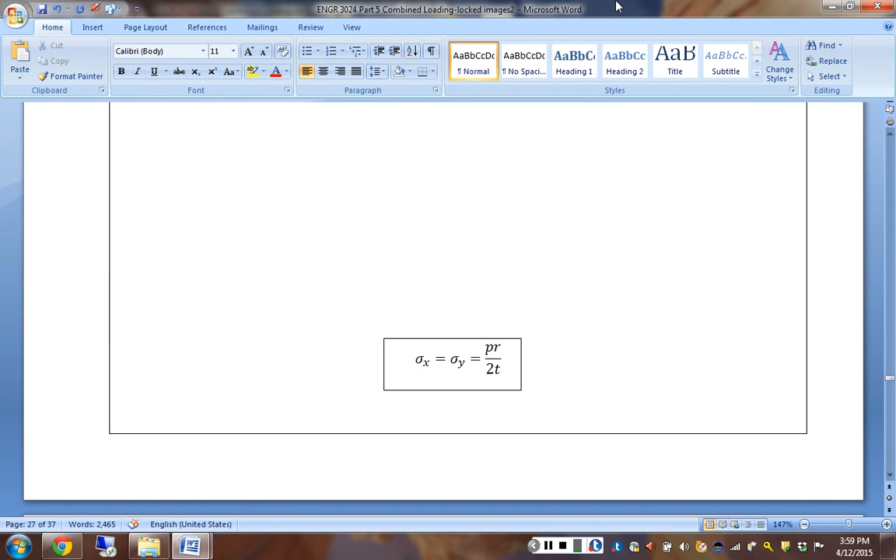Alright, so these first couple of pages have established that for a cylindrical pressure vessel, you have hoop and axial stresses that are not equal, and it is twice as big in the hoop direction.

And if we take this case for a spherical pressure vessel, because of the symmetry, we actually end up with stresses in any direction, regardless of the direction that we take the slice, the same as the axial direction for cylindrical. So it's stronger, it's a better case.

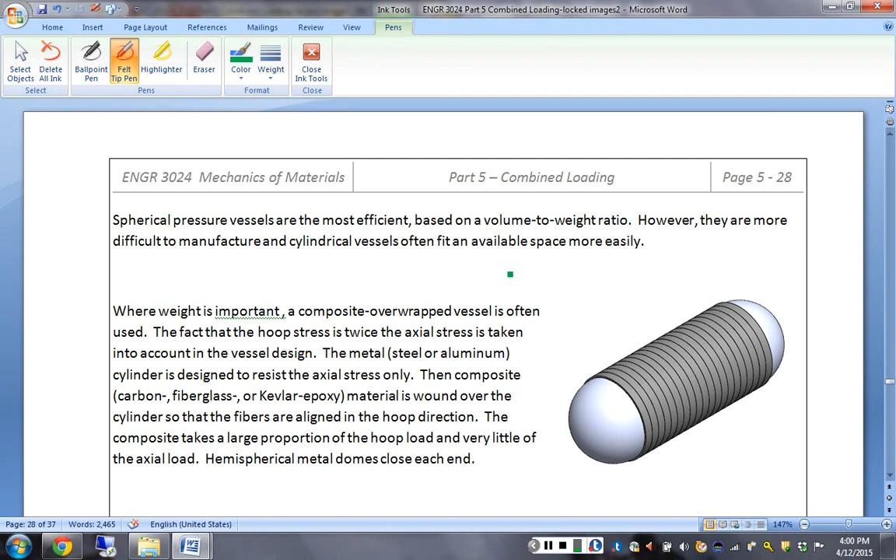One way that we can make a cylindrical pressure vessel, which are typically easier to manufacture and easier to deal with, is to take the hoop direction and support it and make it stronger than just the material is by its own accord. Doing that by wrapping with carbon fiber or any kind of composite to support that hoop direction and take that load.

So now moving into a little bit of material that's relevant to the pressure vessel lab that we'll be doing is thinking about these stress-strain relationships now that we have loading in two directions. This pressure gives us load and therefore stress in both the x and the y directions.

So far, when we've dealt with the relationship between stress and strain, we have had this case right here, a plain old Hooke's law. However, this Hooke's law is valid only when loading is in the axial direction.

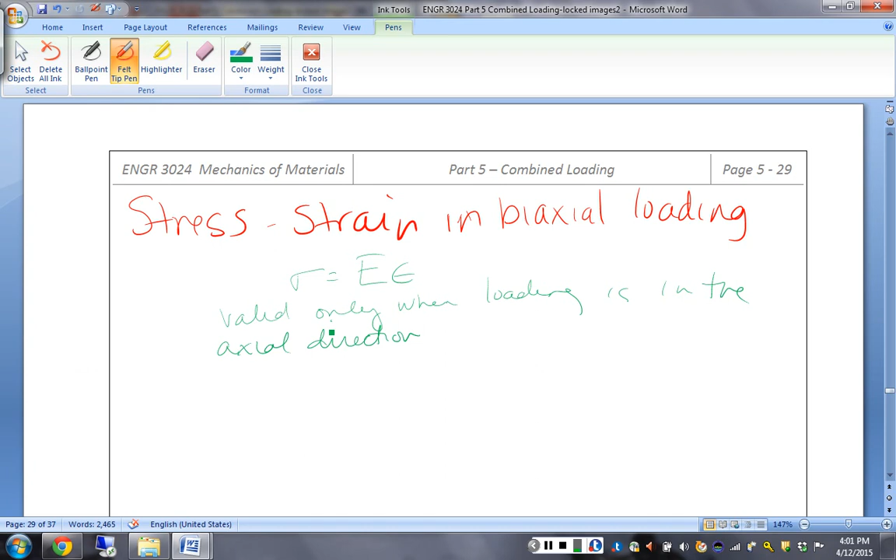We've got a little bit more going on now, and we need to think about what's happening in both directions. So if we have our section of material and we consider what's happening because of this applied stress in the x direction, we know that we expect it to get longer in the x direction and we expect it to contract in the y direction.

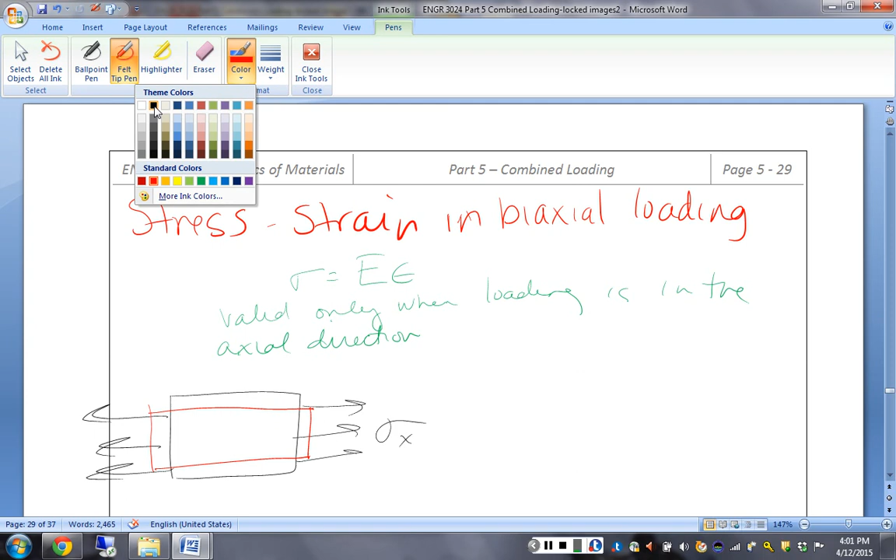We expect that the strain in the x direction is proportional to the stress in the x direction, but we know that Poisson's ratio enters the picture when we start talking about the strain in the y direction, and that is the negative Poisson's ratio times the strain in the x. That how much it shrinks in y is proportional to how much it grows in the x direction.

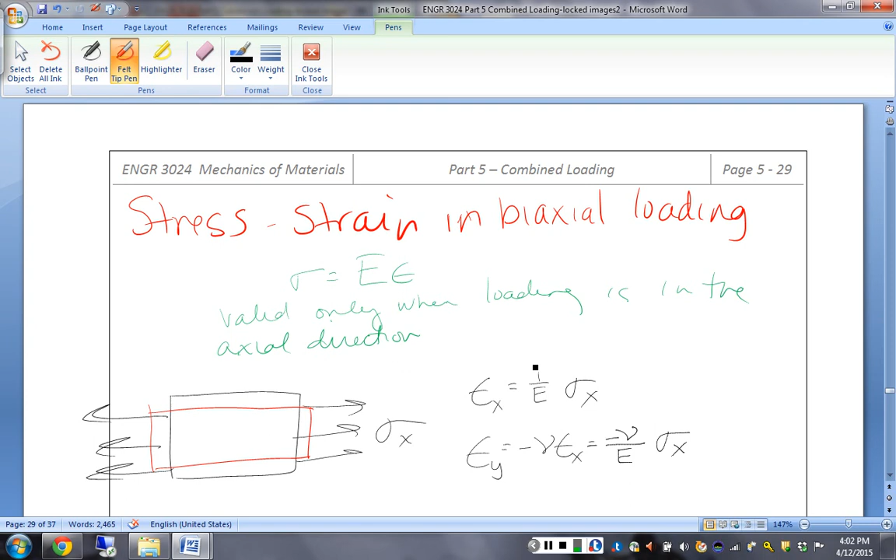But we can also say that it is related to the stress in the x direction as well. So we have strain in x is proportional by the modulus of elasticity, and the strain in y is proportional to both Poisson's ratio and the modulus of elasticity.

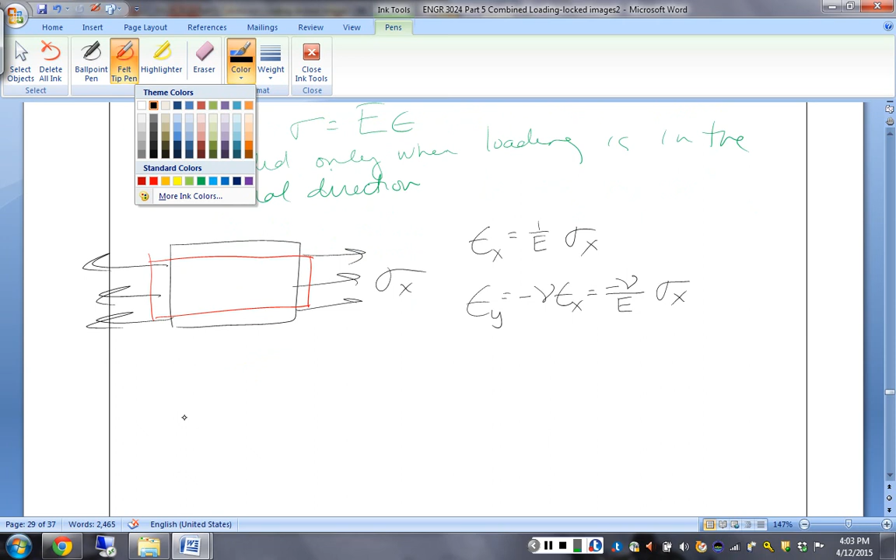Okay, if we now think about the contribution to the strain for our stress in the y direction, we know that our structure is expected to get longer in the y direction, shorter in the x direction, and we can write the same relationships.

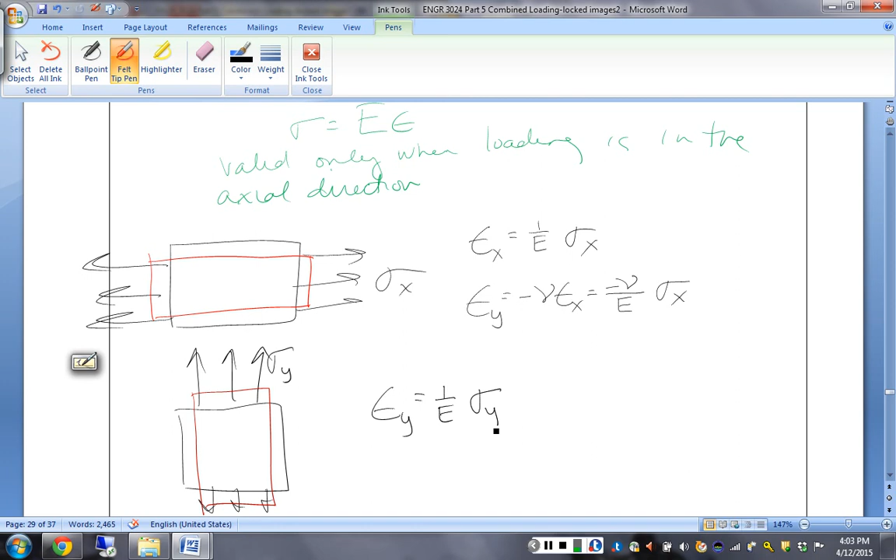That our y strain is expected to be related by the modulus to the stress in the y direction. The strain in x is the negative Poisson's ratio times the strain in y.

Or casting that in terms of the stress in the y direction, we again have this negative Poisson's ratio over the modulus times the stress in y.

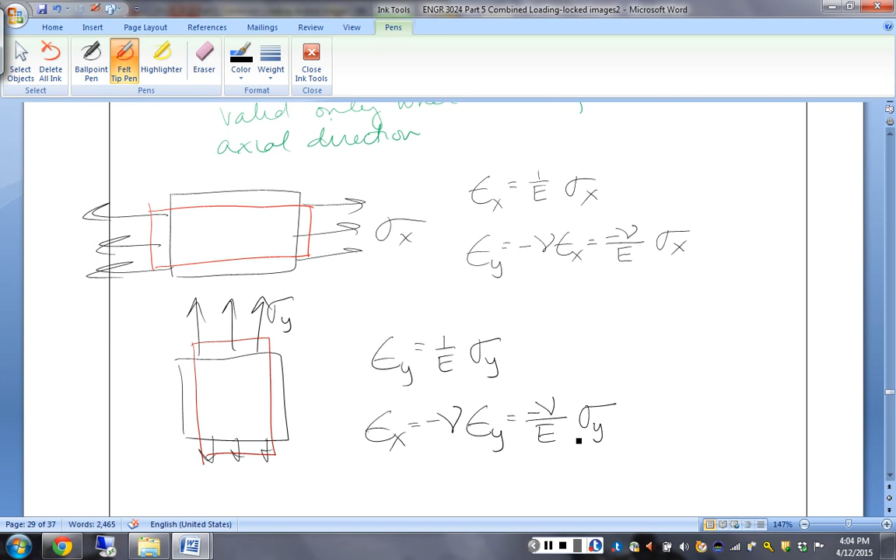The third thing that we haven't discussed in quite a while is what about the shear stress and the shear strain? That shear stress is equal to the shear modulus times the shear strain gamma, or if we're talking about these in terms of the shear strains, we can simply solve this as gamma is 1 over the shear modulus times the shear stress.

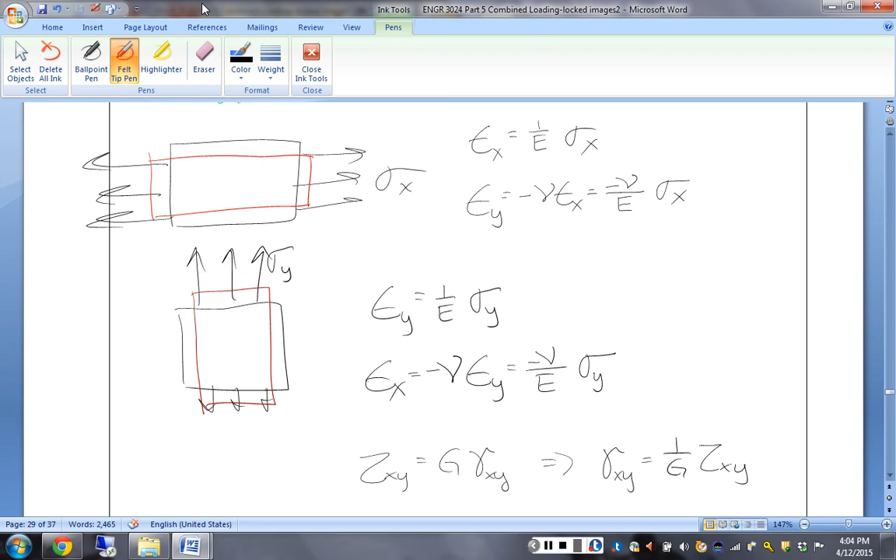So now we can take these expressions and end up putting them into a more compact matrix form.

So what we want to end up with is a matrix formulation that has our stress in the x direction, our stress in the y direction, our strain in the x direction, our strain in the y direction, and our shear strain in terms of the corresponding stress in the x, stress in the y, and shear stress.

So to simplify our life a little bit, we can think about the expressions. We have strain in the x direction, if we look at the first expression on the other page, is 1 over the modulus times the stress in the x direction plus nothing times the stress in the y direction plus nothing times the shear stress.

The second expression is the negative Poisson's ratio over the modulus times the stress in the x direction, nothing times the stress in the y direction, and nothing times the shear stress.

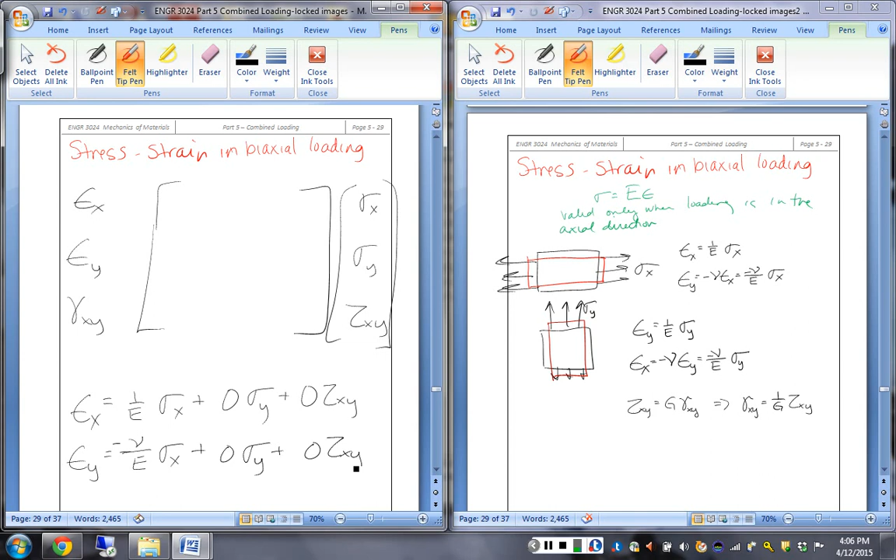Then we move to the strain in the y direction, which is equal to nothing times the stress in x plus 1 over the modulus times the stress in y, and nothing times the shear.

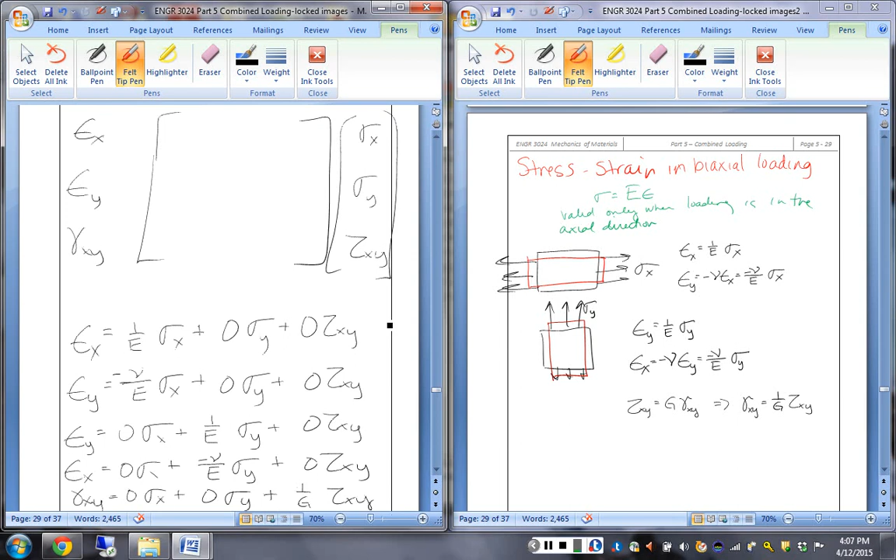We have another expression for the strain in x, which is nothing times the stress in x plus the negative Poisson's ratio over the modulus times the stress in y, and nothing for the shear. And our last one, gamma xy, is no x stress, no y stress, and 1 over G times the shear stress. So if we now put those into our appropriate locations in our matrix...

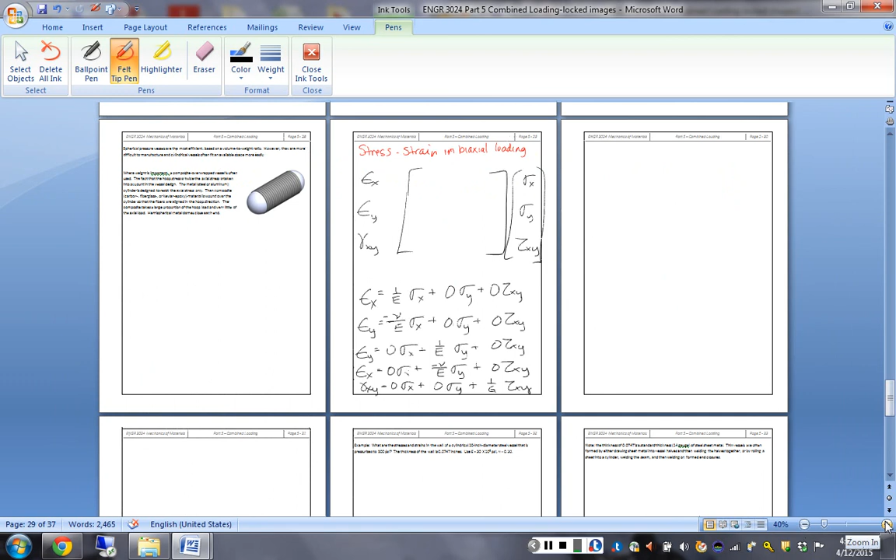We will see from the first equation we get a 1 over E. From this fourth equation we get a minus nu over E, and from none of the equations we get a 0. From the second and third equation we see we get a minus nu over E in the first position, 1 over E in the second, and zeros for the shear stress.

And for the gamma: nothing for normal stress in the x direction, nothing for normal stress in the y direction, and a 1 over G for the coefficient of the shear.

Now we have this matrix formulation for our stress-strain relationships. But what do our strain gauges measure? We measure our strains, not our stresses. We need to solve these so that we measure strains and we get stresses out.

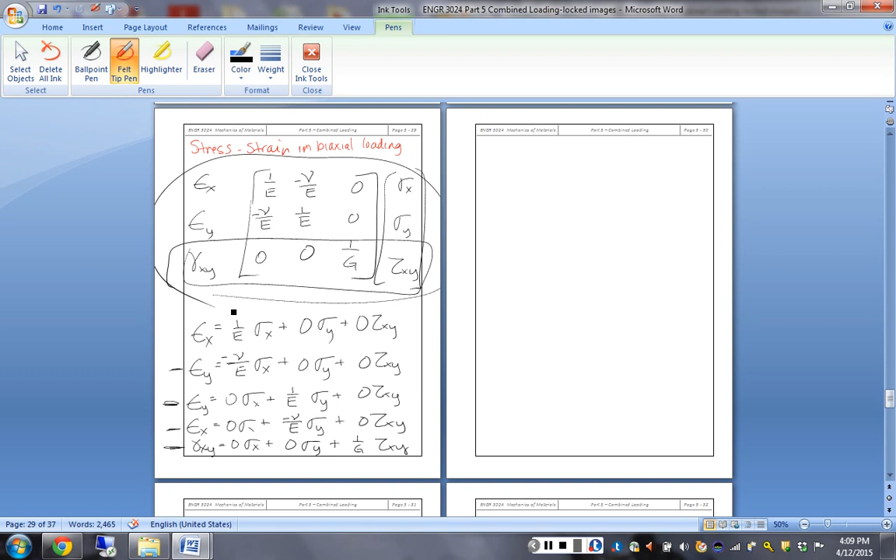And because these are coupled equations, we can solve these in closed form, and we end up with these two expressions which we can solve...

for stress in x, which is the modulus over 1 minus nu squared times this combination of the strains, and the y stress is equal to the same coefficient times a combination of the x and y strain, and again decoupled, the shear stress is equal to the shear modulus times the shear strain.

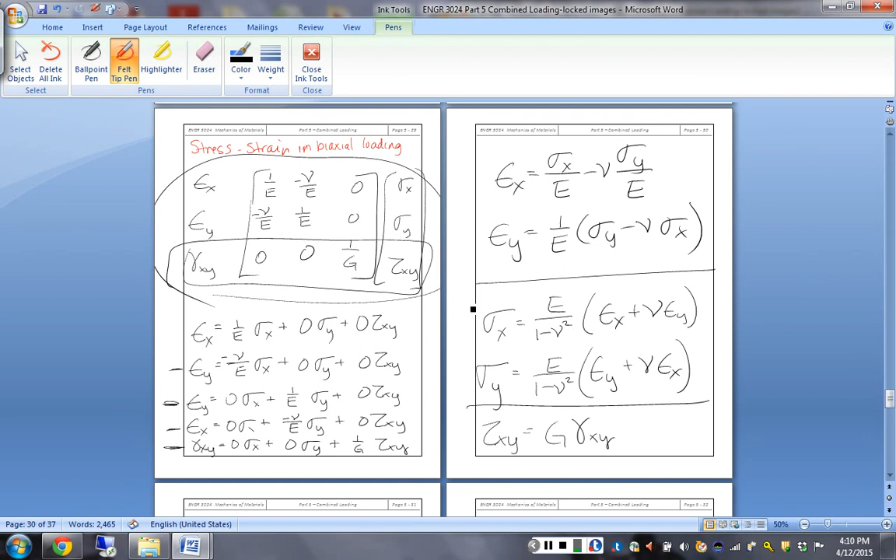With these equations, we can now move into an example problem. So coming back to: what are the stresses and strains in the wall of a cylindrical 10-inch diameter pressure vessel pressurized to 500 psi. We're going to say that this is steel with a modulus of 30 million, a Poisson's ratio of 0.3.

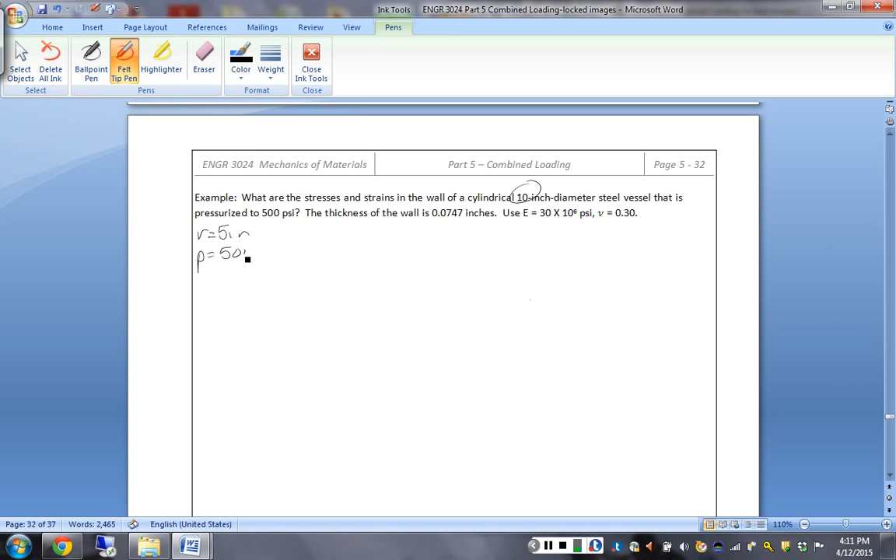A diameter of 10 inches ends up being a radius of 5 inches. We have a pressure of 500 psi, and we know that the wall thickness is 0.0747 inches. First thing, this is a cylindrical pressure vessel, so we can use our equations.

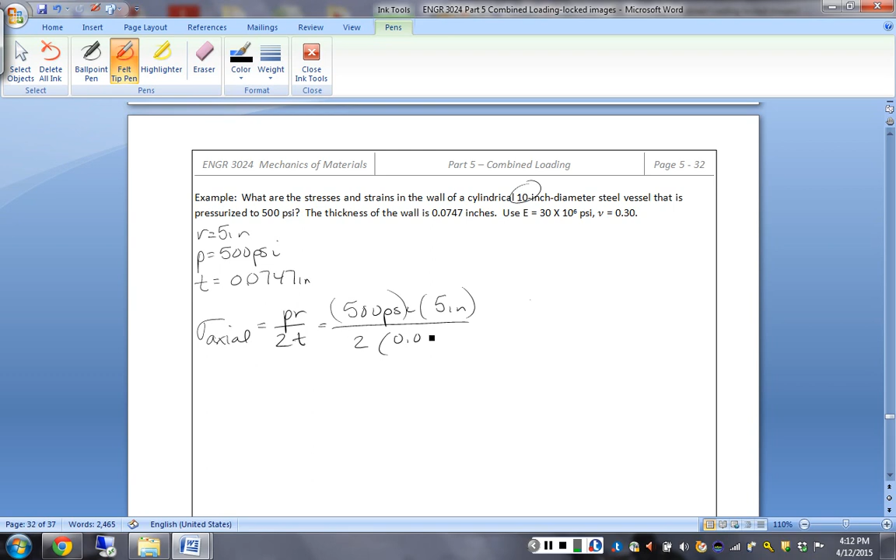The axial stress is PR over 2T: 500 psi times 5 inches over 2 times the thickness, 0.0747. So we have an axial stress of 16,733. We know that the hoop stress is 2 times the axial, so we have 33,467 psi.

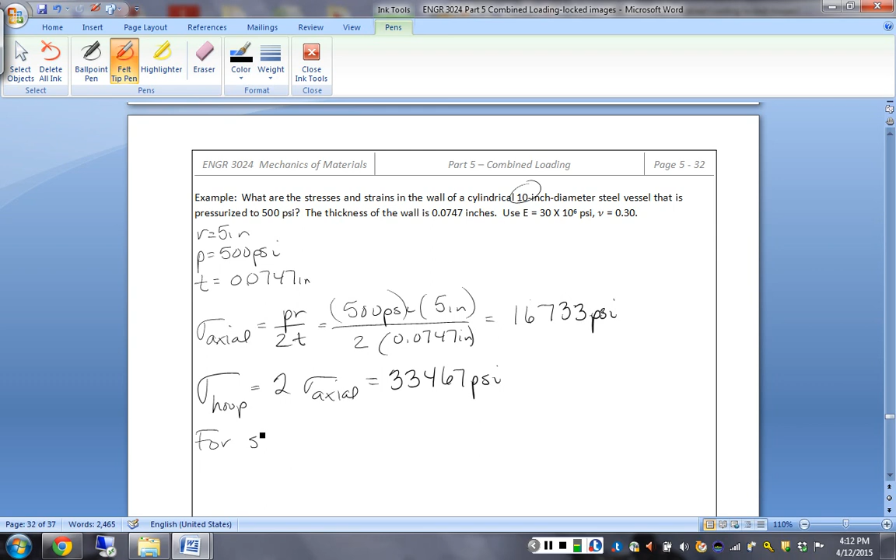Now, the expected strains in the forward direction, or strains as a function of stress, we have the x direction stress over the modulus minus Poisson's ratio times the y stress over the modulus, or pulling out this term...

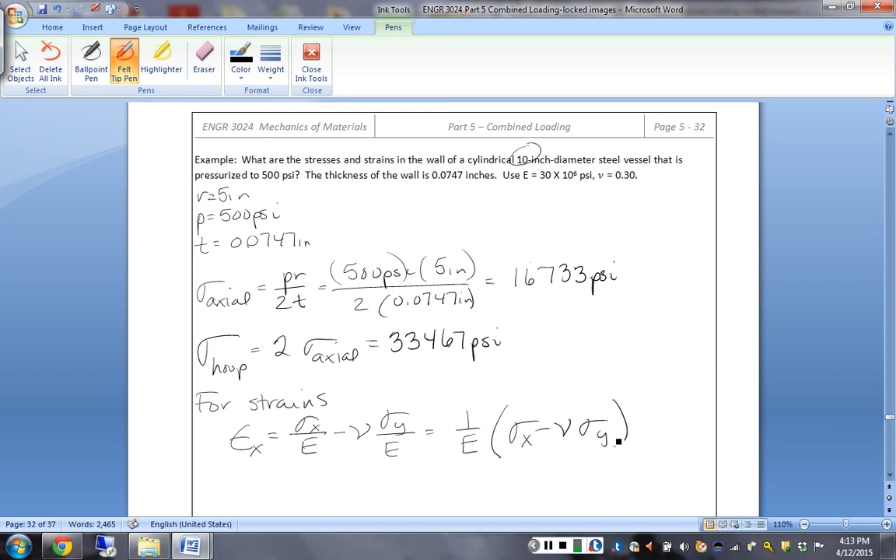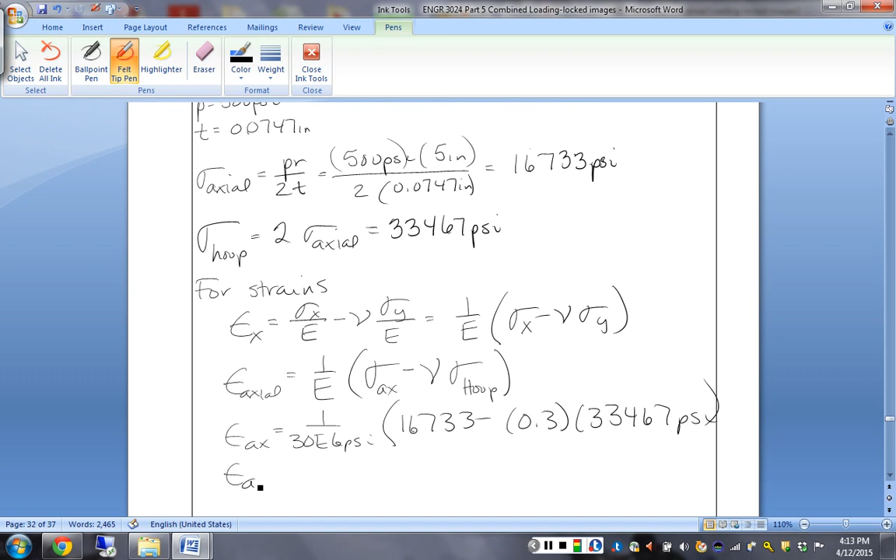If we consider our x direction, our axial direction, we can say that our axial strain is equal to 1 over our modulus times our axial stress minus Poisson's ratio times our hoop stress: 1 over 30 million times our 16,733, with a 0.3 Poisson's ratio, minus 33,467 psi. We expect an axial strain of 0.000223.

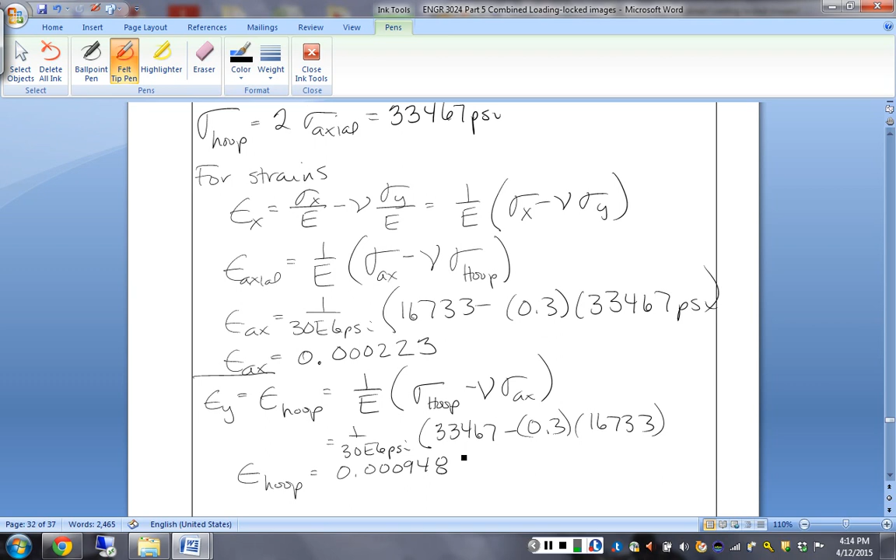For the strain in the y direction, which we can also say is the hoop direction, that will be the hoop stress minus Poisson's ratio times the axial. So 1 over 30 million times our 33,467 minus Poisson's ratio times the axial stress. So we expect strain in the hoop direction that is 0.000948.

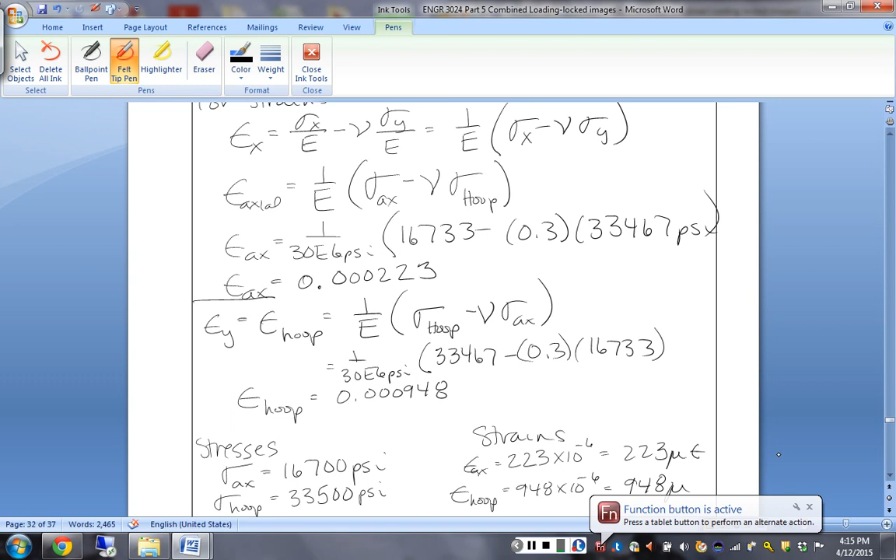So summarizing, we have stresses in the axial direction of about 16,700, in the hoop direction twice that, 33,500, and strains, if we report them in microstrain, which is like the indicator boxes in the lab, we have axial strain of 223 times 10 to the minus 6, or 223 microstrain, and in the hoop direction we have 948 times 10 to the minus 6, or 948 microstrain.

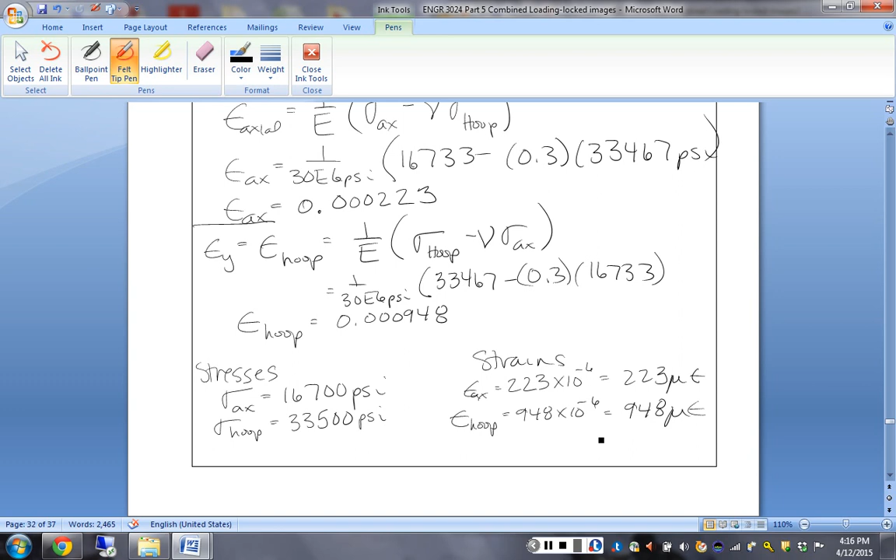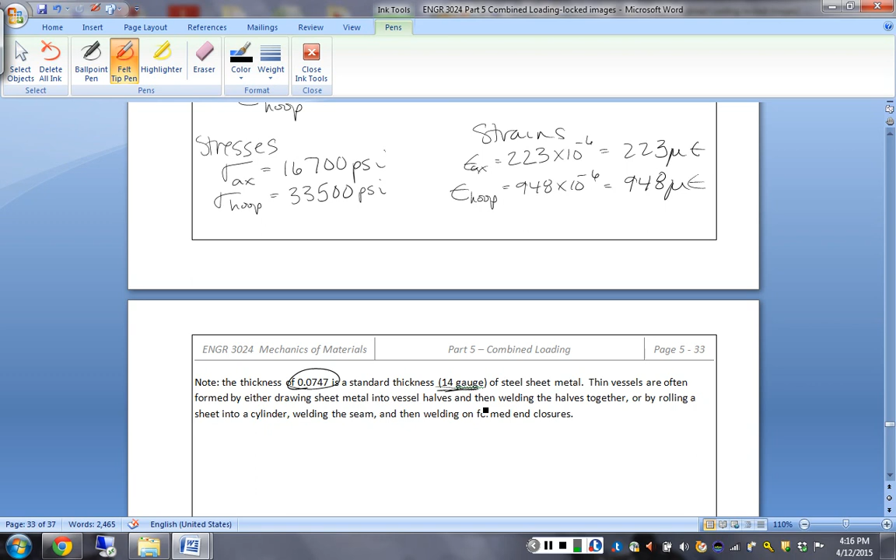Again, this is taking it to 500 psi, which is well beyond what the shop air can do. And I guess another note is that this thickness of 0.0747 is a standard 14 gauge steel sheet metal. Very often they put these pressure vessels together, as you can see from the sample we've got, the air tank in the lab, that they are pulled into basically half of the vessel and then welded together, and then welding on end caps.